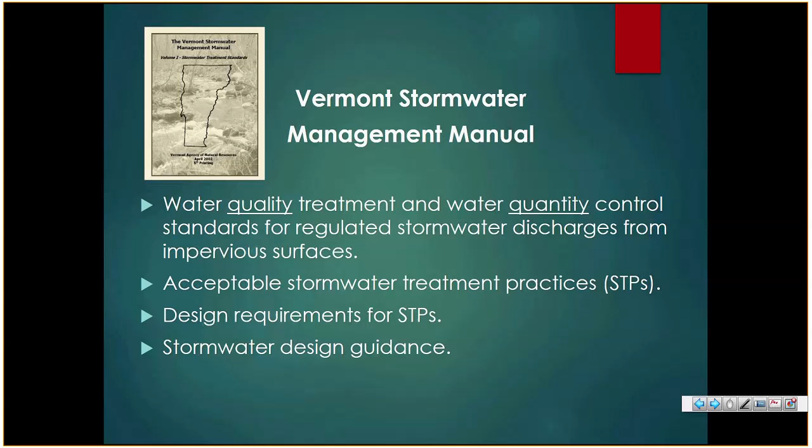Why update the Stormwater Management Manual? The current manual hasn't been updated since 2002. This is an opportunity to align design requirements with current statewide water quality goals, increase treatment and control requirements, require the use of most effective STPs, and now include green stormwater infrastructure. We're also required to update the manual under our statutory obligations under Act 64, the Vermont Clean Water Act.

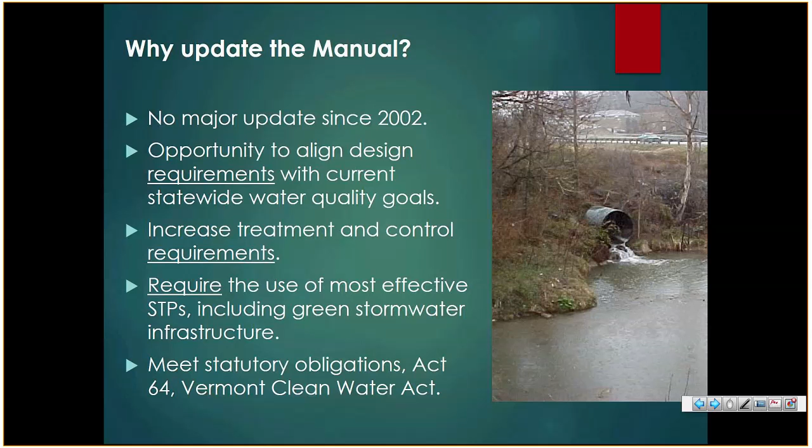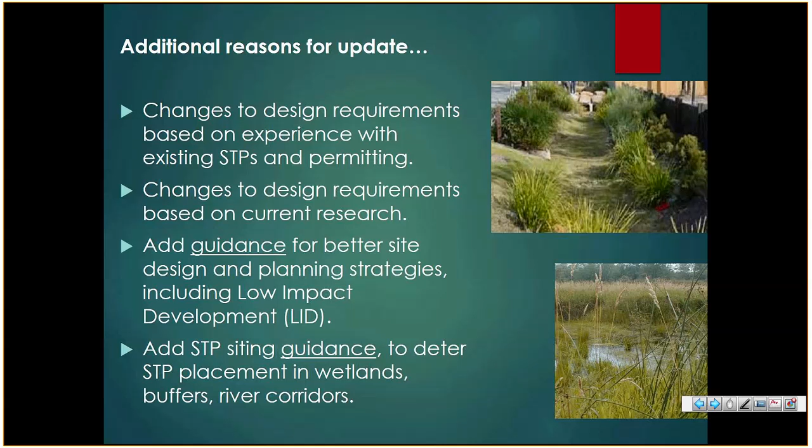Additional reasons for this update: we're making changes to design requirements based on experience with existing stormwater treatment practices and permitting in Vermont, and based on more current research. We'd like to add guidance for better site design and planning strategies, including those associated with low impact development (LID), and add STP siting guidance to deter placement of these practices in wetlands, buffers, river corridors, and other sensitive areas.

This has been a long road. Our manual update timeline shows we initiated efforts back in 2009, convening a stormwater work group. Through 2013 and 2014, we held a stakeholder process which provided other considerations for the update. The department then contracted with Stone Environmental Horsley Witten Group to draft a manual in consideration of the earlier comments and process.

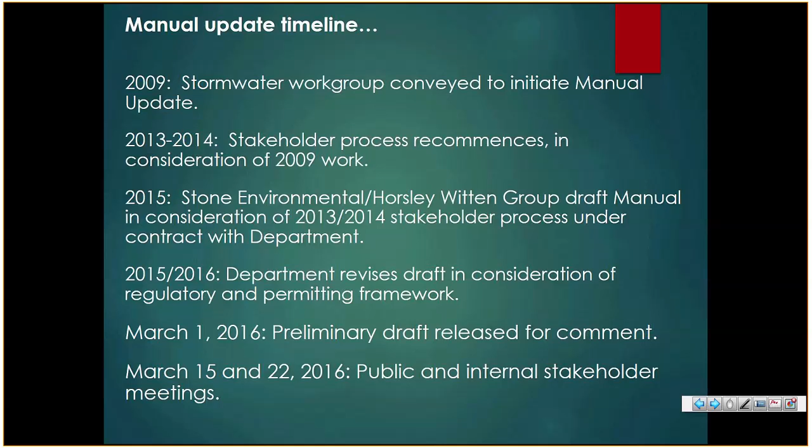More recently, we developed a new draft of the manual in 2015 and 2016, releasing it for comment in March 2016. We held several public and internal stakeholder meetings in March of that year, then revised the draft for rulemaking in consideration of comments this summer. This fall, we passed the new Vermont Stormwater Management Rule through ICAR, the Interagency Committee on Administrative Rules, and received LCAR approval, the Legislative Committee on Administrative Rules. The final rule was recently filed with the Secretary of State, so the rule and manual are now adopted with an effective date of July 1st, 2017.

Some notable changes in the Vermont Stormwater Management Manual: Subchapter 1, the introduction and purpose, sets forth a manual review period, particularly a review of the STPs, to occur on a 5-year interval, ensuring STPs remain effective for meeting water quality goals. The manual was also developed in conformance with the anti-degradation policy, the Vermont Water Quality Standards, and in consideration of groundwater protection and current state policy for groundwater.

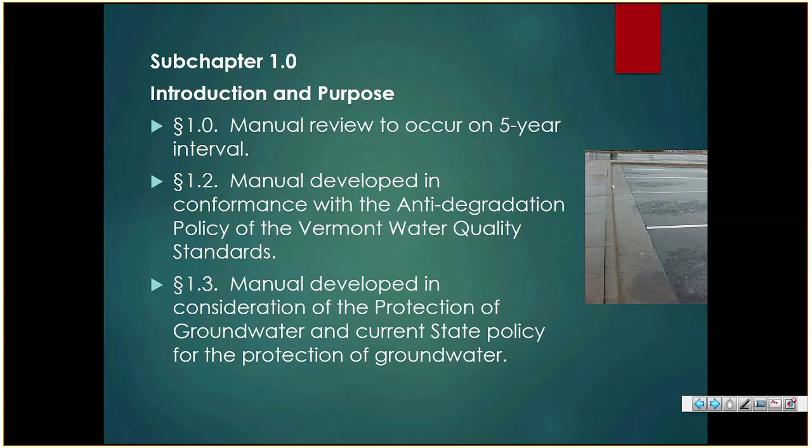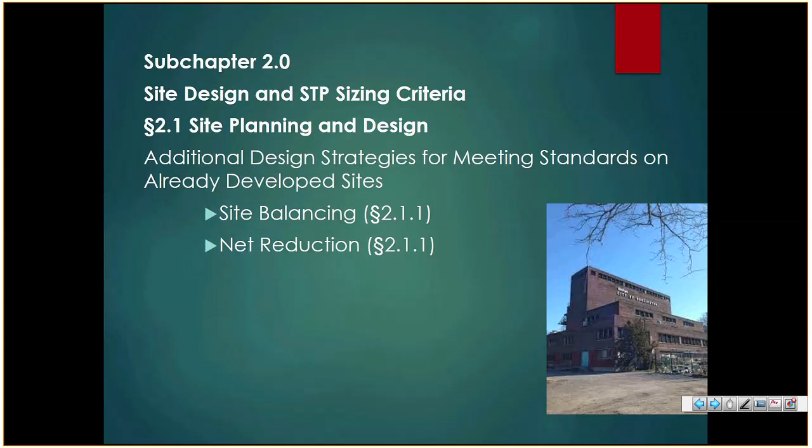Subchapter 2 includes design changes and STP sizing criteria changes. Under site planning and design, there are additional design strategies for meeting standards on already developed sites. This includes a previously used procedure known as site balancing, which allows treatment of existing impervious surfaces in lieu of treating some new ones, and a net reduction strategy, which allows reducing impervious surfaces on already developed sites.

The treatment standards have also been revised. We have a new standard, which is the post-construction soil depth and quality standard, aimed at maintaining and restoring healthy soils on developed sites. As we know, soils provide water infiltration, nutrient and pollutant adsorption, sediment and pollutant biofiltration, storage and transmission, and also the ability to decompose pollutants.

This standard will require that a designer either protect the existing soils from disturbance or restore soils upon completion of construction. This will be through reestablishing or amending soils with organic matter, compost, or other material, and then retilling the soils to restore their function.

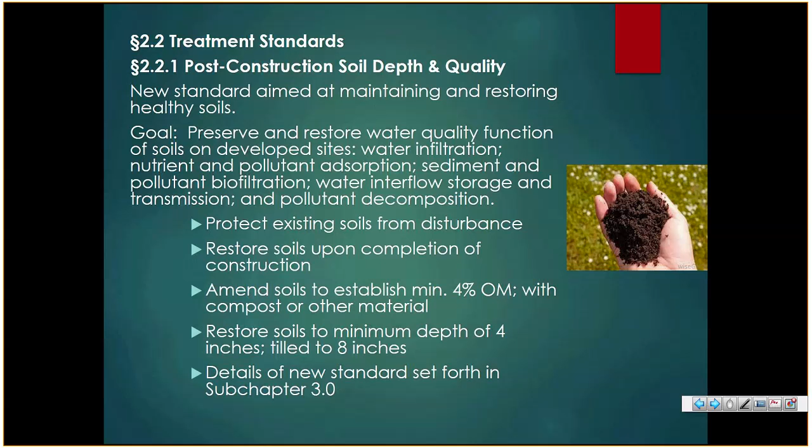The treatment standards in the new 2017 manual have a framework of runoff reduction, essentially absorbing the storm and retaining the water on site. This will reduce pollutant export, hold the stormwater on the site, and focus on practices that promote infiltration, reuse, and evapotranspiration.

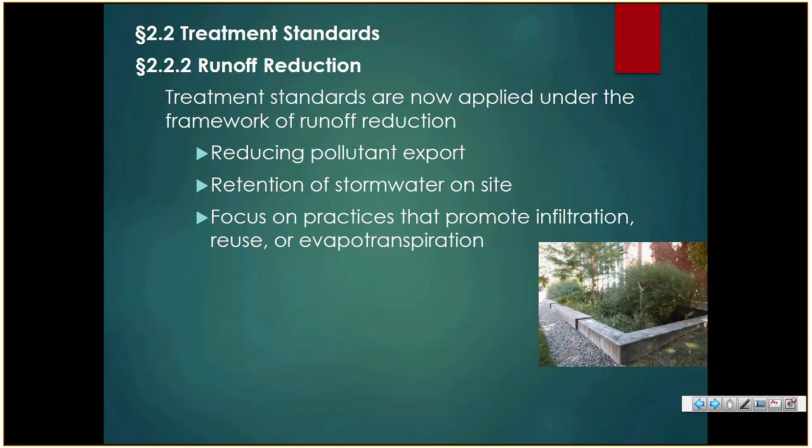The groundwater recharge standard, which was also a standard in the 2002 manual, preserves existing water table elevations. This standard was revised to require more recharge based on the hydrologic soil group of a site, and aligns with the runoff reduction approach in the new manual. For example, for A soils there's a 50% increase, down to C soils where there will be a 150% increase in recharge requirements. The standard does remain waived for D soils, which are indicative of clay-type soils.

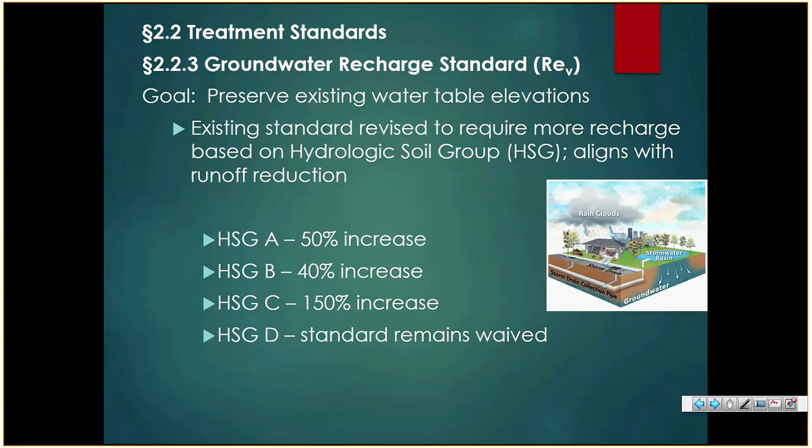The water quality treatment standard was also revised. This is the standard that provides treatment for stormwater pollutants from the majority of storm events. It's been increased to 1 inch of rainfall or runoff, previously only 0.9 inches. This is representative of 90% of all storm events.

New development is still subject to treatment of 100% of the water quality volume. There is a significant increase for what redevelopment must treat: a 150% increase. This was previously only a 20% water quality volume value, but that's increased to 50%. Developers also have the option of removing existing impervious surface and restoring soils to meet the standard.

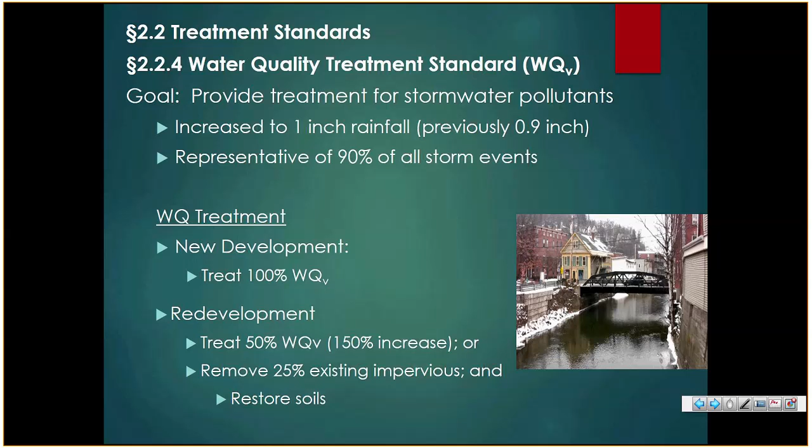In line with the runoff reduction approach, water quality practice selection is a new piece of the 2017 manual. This establishes tiers of practices, specifically Tier 1, Tier 2, and Tier 3 STPs. STP selection for designs for both new and redevelopment projects must be prioritized by runoff reduction and by pollutant removal efficiency, in consideration of feasibility on the site.

This is to ensure that sites able to provide the best treatment will do so through the implementation of Tier 1 STPs. These types of practices, such as the one shown here on the right, an underground infiltration system under construction, will generally achieve greater than 80% total phosphorus removal and 98% total suspended solids removal.

Tier 2 practices include filtering practices like bioretention that might not be able to infiltrate due to soils, and Tier 3 practices include lower performing practices like wet ponds.

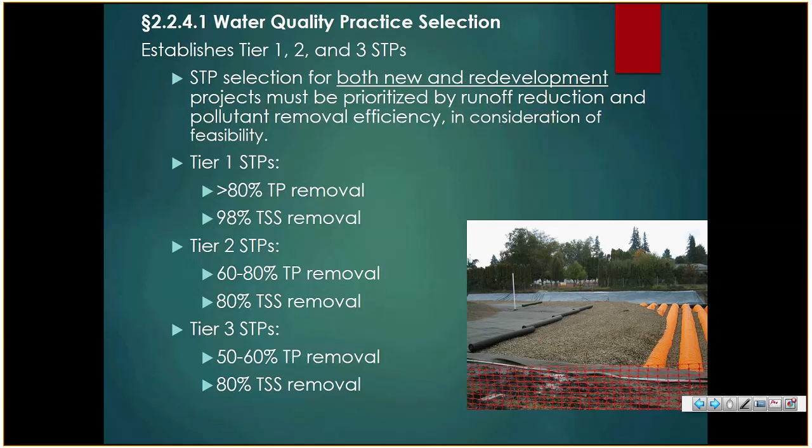The channel protection standard remains in the manual. This is control of the 1-year, 24-hour storm, to protect stream channels from scour and erosion. This standard now includes an additional method, the hydrologic condition method, which allows for crediting runoff reduction STPs.

The hydrologic condition method is essentially mimicking your post-development site as if it was in woods in good condition. So you're basically pulling that increase in volume off of your developed surfaces and either retaining it on site or infiltrating it. The extended detention and alternative extended detention methods still are applicable in the manual when the HCM method is not used.

It's also worth noting that the waiver for expansions of less than 1 acre of impervious has been removed.

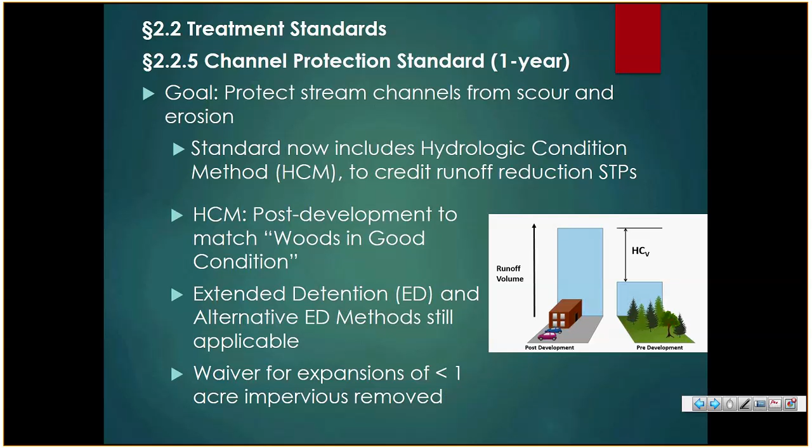Subchapter 2, we also continue into site design and STP sizing criteria. All of those standards, the channel protection, which is the 1-year, and then the flood protection standards, the 10 and the 100 year, now must use updated precipitation data. The existing 2002 manual relied upon county-specific data that was somewhat outdated.

So the new precipitation data is found through the NOAA Atlas 14, a tool designers can use to pinpoint their project location and get all the rainfall data they need. The important piece to recognize with this data is that it considers regional variations around the state and elevational differences. For example, many of the counties include mountainous environments and valley environments for which precipitation does vary.

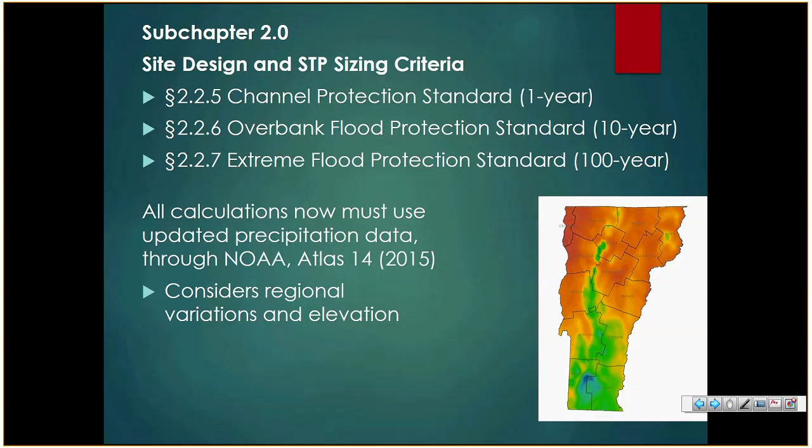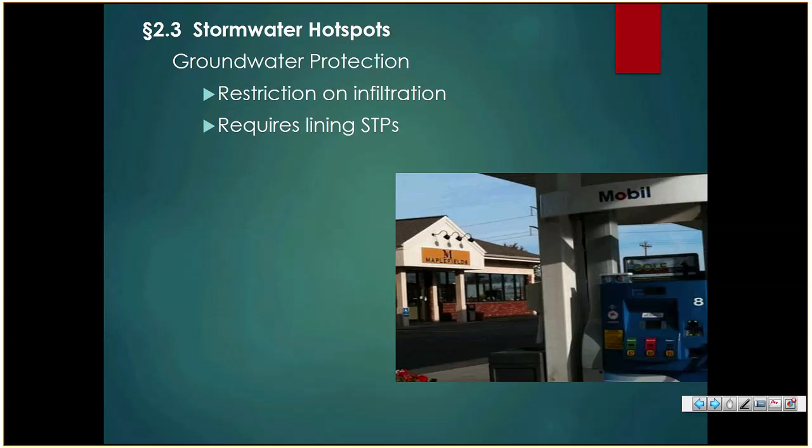The new manual also speaks to stormwater hotspots in consideration of groundwater protection. We further articulate the restriction on infiltration from these types of sites and require lining of certain STPs when there is runoff contributing from hotspot land uses.

The new manual separates pretreatment practices from standard water quality treatment practices. We have these now organized in one section, which should be easier for designers to navigate through.

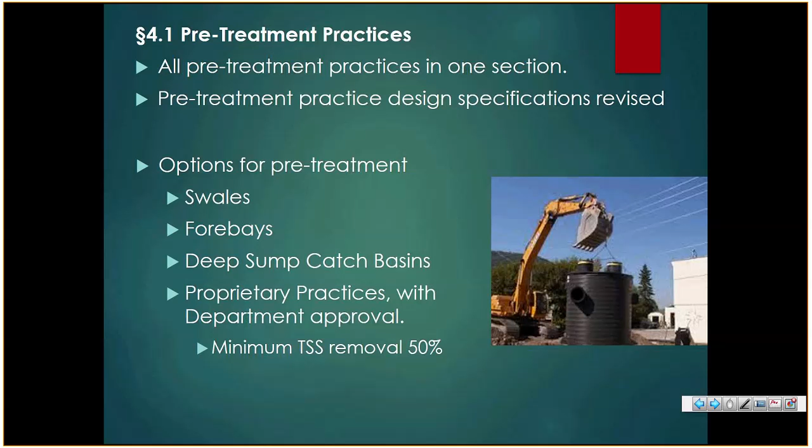The pretreatment practice design specifications have also been revised. Some of the options for pretreatment include swales, forebays, deep sump catch basins, and proprietary practices with department approval. Those proprietary practices will still require a minimum TSS removal of at least 50%.

Non-structural STPs are organized in their own section within the manual. The 2002 manual previously had a section specific to credits, so that's been reorganized. We've also added some non-structural STPs and revised some of these in consideration of our experience.

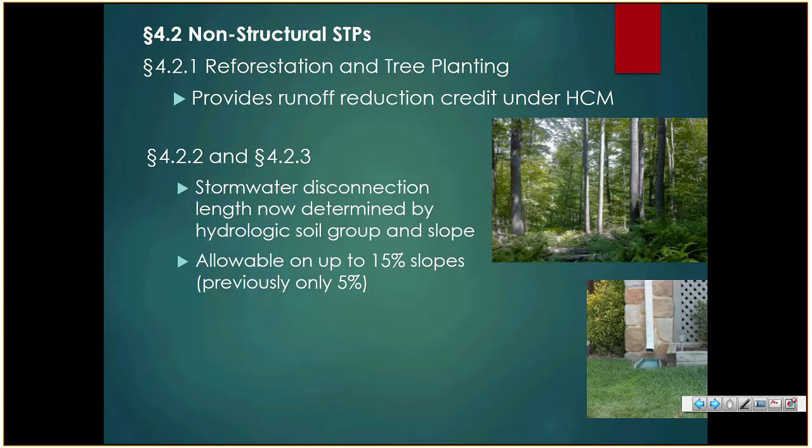There is a new practice called reforestation and tree planting, which allows for credit under the runoff reduction approach. Stormwater disconnection lengths are now determined by both hydrologic soil group and slope, and will now be allowable on up to 15% slopes, where previously only allowed on 5% slopes. This should give designers greater flexibility in disconnection of runoff, which is a runoff reduction approach.

Structural STPs, also found in their own section, have been revised. Some of the lowest performing STPs are no longer acceptable for water quality treatment, including linear grass channels and wet swales. They may still be used as conveyance, but for primary treatment they are no longer acceptable, primarily due to the fact that they don't provide much for phosphorus reduction or sediment removal.

Bioretention practice has also been revised. We're looking for a low P soil mix based on recent research that suggests these can export phosphorus when a low P soil mix is not used. Soil mix will be required to be tested for available P. If a bioretention practice is a Tier 1 STP, it would be designed to infiltrate. Otherwise, it would just be a filter under a Tier 2 STP.

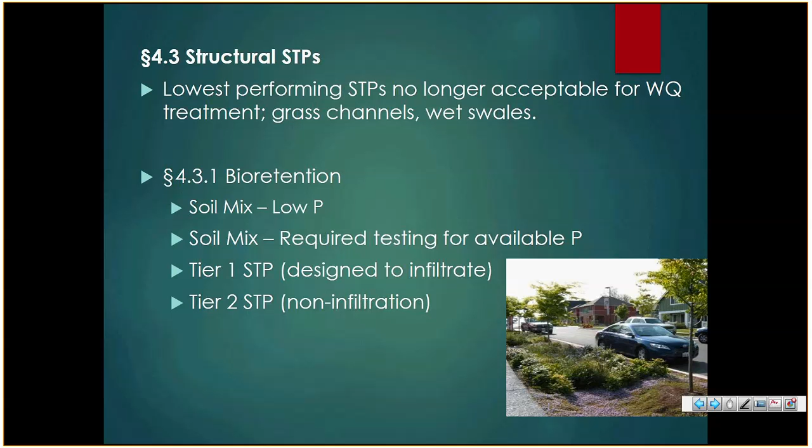Other structural STP revisions: infiltration. We've brought infiltration testing right into the manual. This was previously located in Volume 2 of the 2002 manual, and was at times considered slightly excessive for requirements demonstrating that soils will be able to infiltrate. We've also lowered the allowable infiltration rate to 0.2 inches per hour, which will allow more sites to use these preferred practices. Infiltration is a Tier 1 STP.

There are, however, groundwater protection considerations for these practices, including setbacks from potable water sources and groundwater source protection areas.

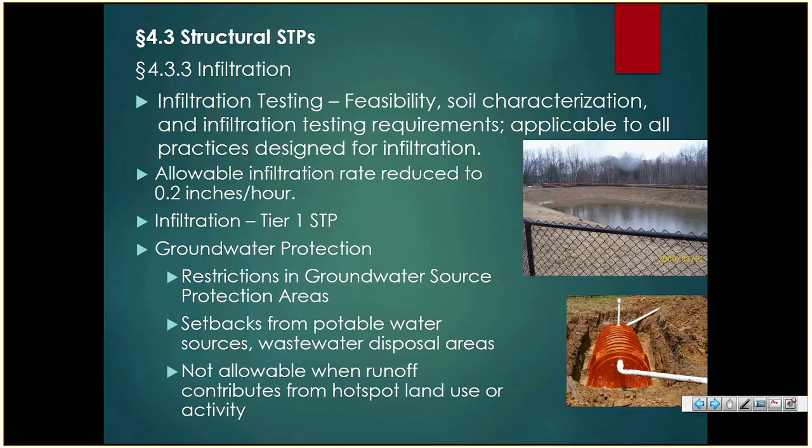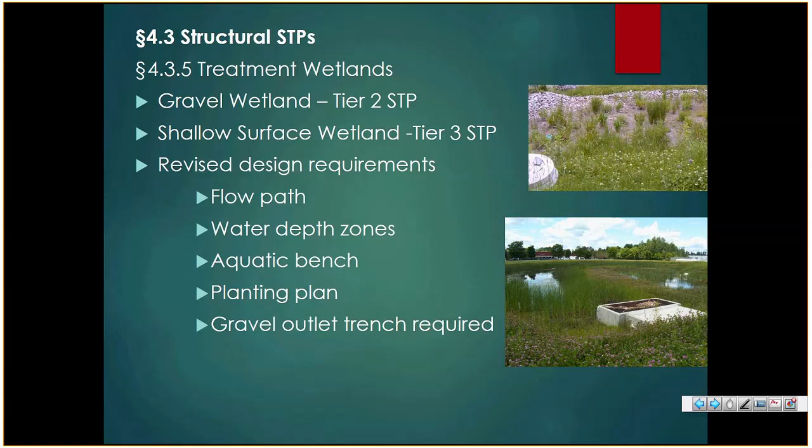Treatment wetlands include both gravel wetlands and shallow surface wetlands, the latter being a Tier 3 STP. We've revised the design requirements on these practices to ensure they provide the highest treatment possible, including lengthening the flow path, water depth zones, requiring benches and a planting plan, and also considering cold water or thermal impacts to cold water fisheries. A gravel outlet trench is a new design component for the shallow surface wetland.

Similarly, wet ponds have similar design requirement changes. The gravel outlet trench is also required along with a planting plan, flow path, and other changes to the water depth zones and benching.

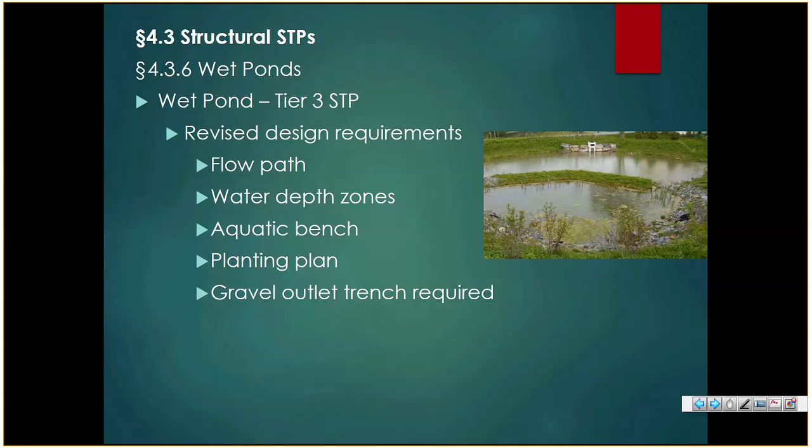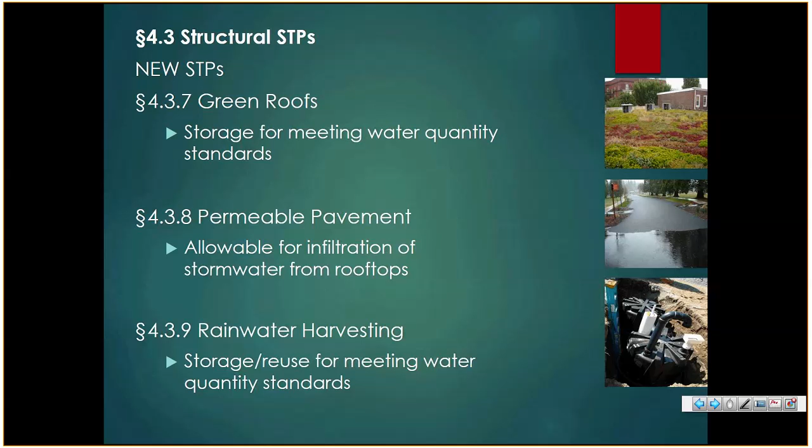There are new STPs added to the manual. These include some of the green stormwater infrastructure mentioned earlier, including green roofs. While these don't provide water quality treatment, they do provide some storage for meeting water quantity standards. In addition, permeable pavement allows for infiltration from rooftops, and rainwater harvesting helps meet some of the water quantity standards, through use of a cistern or some other system.

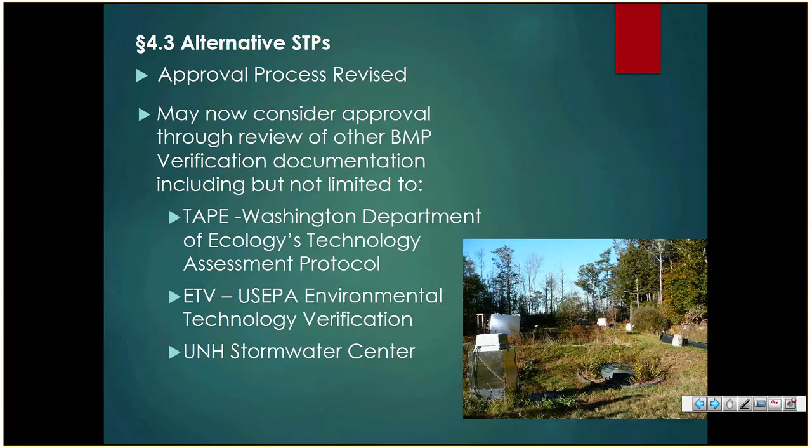Alternative STPs are STPs that are either innovative designs or some other type of proprietary practice offered by a particular manufacturer, not necessarily contained in the manual. We still need to approve those before they're used. However, we may now consider approval through the review of other BMP verification documentation. This includes other testing facilities like the UNH Stormwater Center and other protocols around the country that can verify a proprietary practice's performance.

Detention and conveyance practices are things like dry basins and other types of swales that might just provide quantity control. These have all been moved to subchapter 5, and again, only meet water quantity standards. But now that they're in a different location within the manual, they should be easier for designers to find.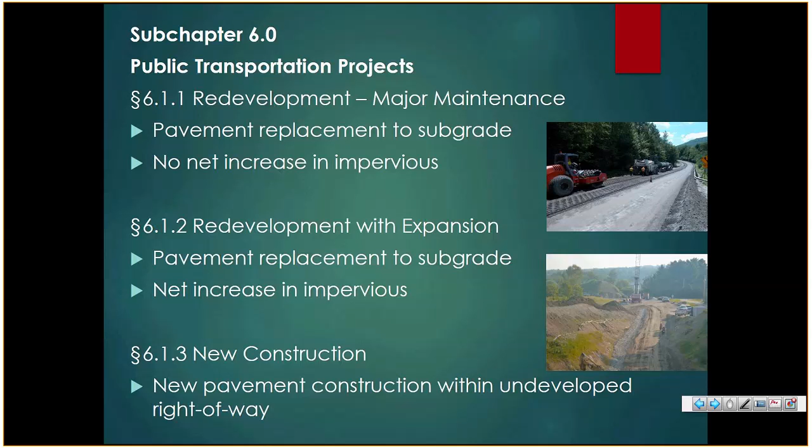This section is specific to public transportation because these projects often have right-of-way limitations, may have already gone through right-of-way acquisition, often have water resource and riparian buffer locations nearby that make stormwater treatment difficult. There's safety considerations and often improvements to existing infrastructure. This new subchapter allows for the identification of the best opportunities for water quality treatment and water quantity control in consideration of those limitations.

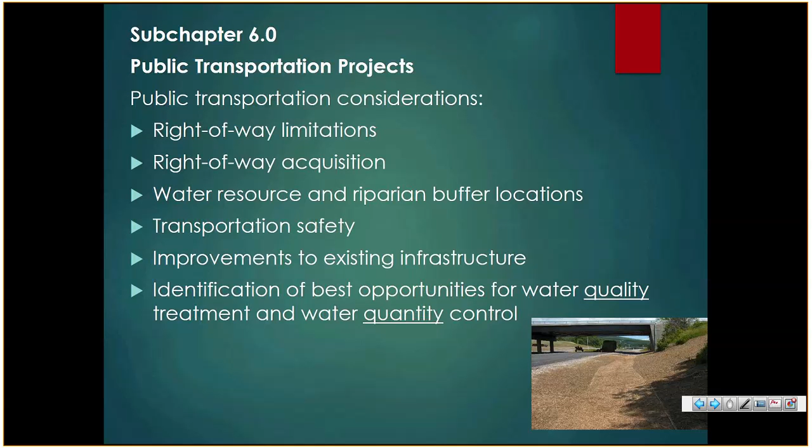So the next steps with regards to the manual: as I noted, July 1st, 2017 is the effective date. DEC, our department and program, is currently merging the requirements in the adopted manual with guidance. This guidance will include photos, schematics, and other important information useful to designers as they prepare permit applications or stormwater designs. We also plan to develop and release revised application forms, design worksheets, and design tools, including design examples under the 2017 Vermont Stormwater Management Manual.

And then lastly, this spring, we're going to be scheduling statewide outreach and training events through many of our regional planning commissions and many of our other partners, that we'll set up for designers and other stakeholders.

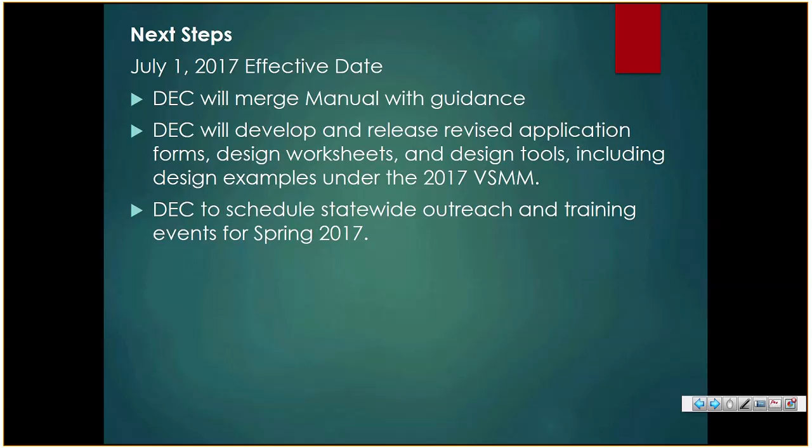Another aspect I wanted to cover in this presentation are Vermont Stormwater Program regulatory updates outside the scope of the manual. Act 64, the Vermont Clean Water Act, requires the development of new stormwater management rules by December 31st, 2017. So those rules are to be developed and adopted this year. Rules are going to be considering statewide water quality goals and other Act 64 requirements. The new rules will consider all permit requirements, and the new rules are to supersede the existing rules.

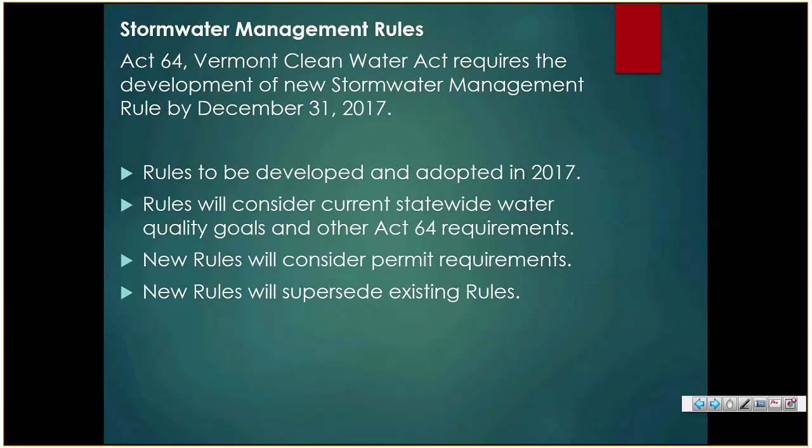Stormwater General Permit: Act 64 also requires the development of a new general permit, which will be applicable to existing development of 3 or more acres of impervious surface by January 1st, 2018. This single general permit will be developed this year, and it's going to include the requirements for those 3-acre sites subject to permitting, but it's also going to have the requirements for new development and redevelopment, and also the requirements for stormwater permit renewal. Many designers might be now familiar with General Permit 3-9015 and General Permit 3-9010. This single permit would be replacing that and all of those permits, so there would be one general permit to apply under.

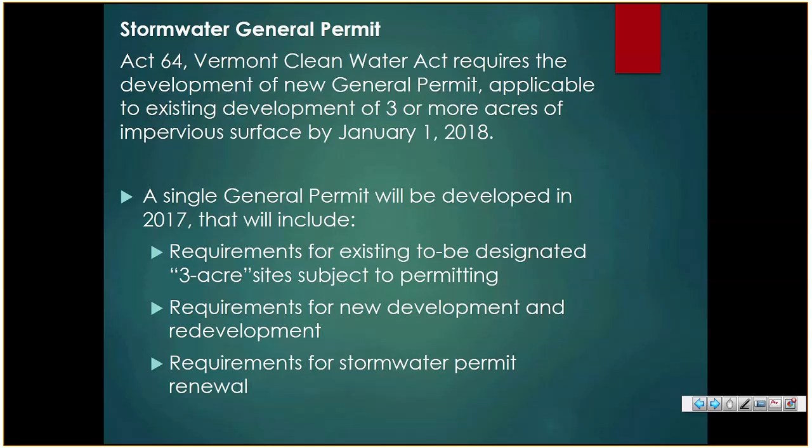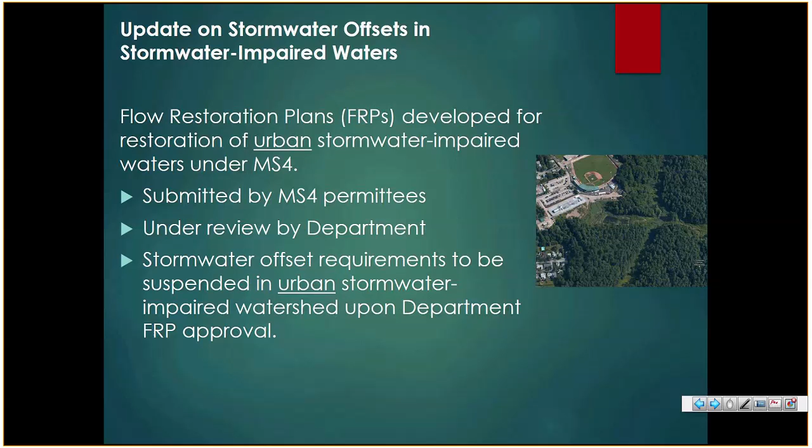An update on stormwater offsets in our stormwater impaired watersheds. Most of our stormwater impaired watersheds are located in the urban areas of Vermont, including the Burlington, Chittenden County area, also up in the northwest corner of the state in Franklin County in the St. Albans area, and also down in Rutland County. Flow restoration plans that were developed for restoration of these urban stormwater impaired watersheds under the MS4 have been submitted by MS4 permittees, and they're currently under review by the department. We expect that we're going to suspend offset requirements in the stormwater impaired watersheds once the department approves the FRPs.

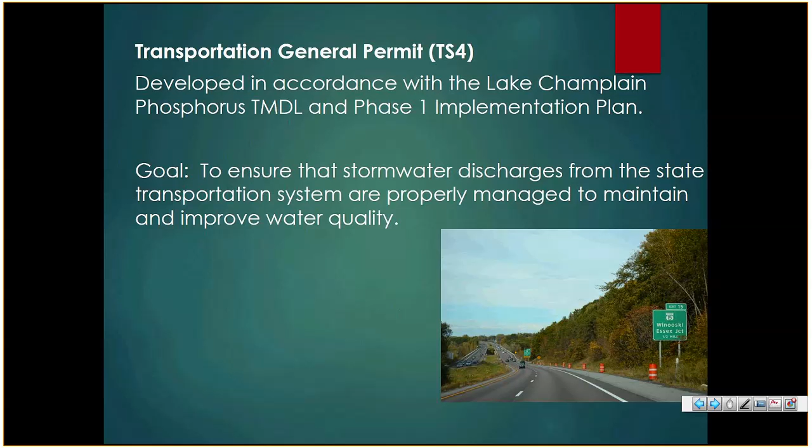Transportation General Permit, or the TS4, was developed in accordance with the Lake Champlain Phosphorus TMDL and Phase 1 Implementation Plan, the goal of which is to ensure that stormwater discharges from state transportation systems are properly managed to maintain and improve water quality. The draft TS4 recently completed public comment process, concluding on December 7th with a public hearing on December 6th. The Vermont Agency of Transportation will be required to apply for the TS4 coverage within 1 year of issuance. The department has since issued the TS4 back on December 28, 2016.

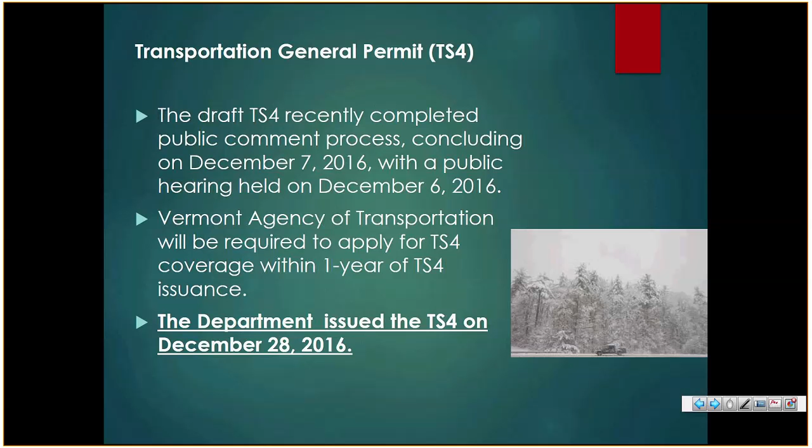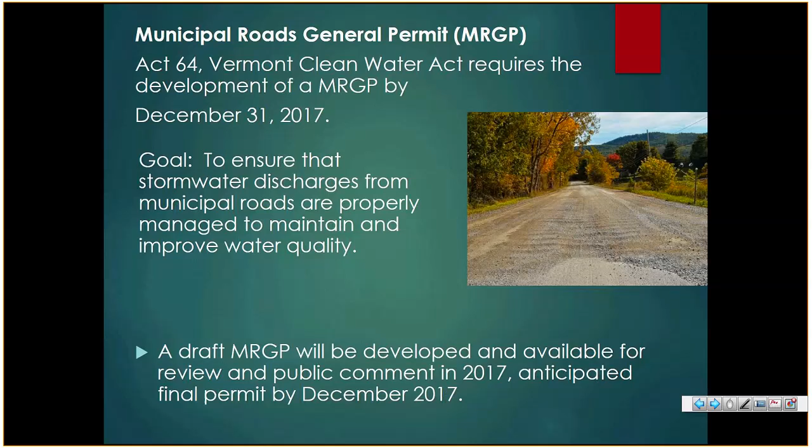The MRGP is to include standards by road type, such as paved roads with catch basins, paved roads with ditches, gravel and Class 4 roads. Towns will be required to apply for the MRGP by July 2018 and complete road erosion inventories and on the hydrologically connected road segments. I should note that there is a map layer of these segments now available on the Vermont ANR Atlas. If you have any questions, I'd suggest contacting Jim Ryan in the Stormwater Program, who would have more information on the MRGP.